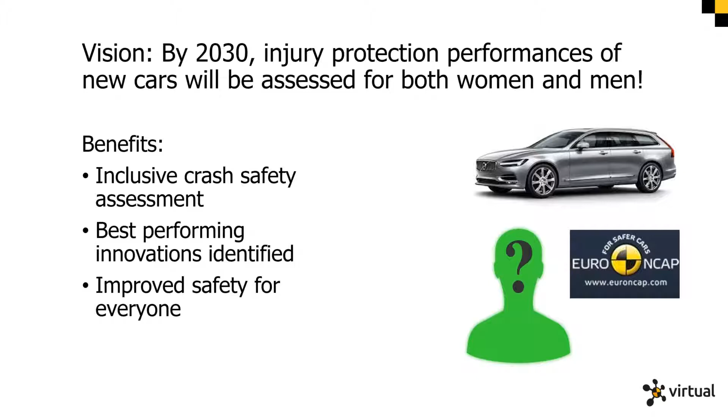We will also be able to identify the best performing innovations already in new cars, as it is today, when it comes to how they work for men and women, rather than waiting 10 plus years before Euro NCAP statistics tell us this. By having a more inclusive assessment of safety, we would improve safety for everyone.

In work package 3, we have a whole work package where we look at occupants in vehicles and novel seating positions for occupants, for the future, where we foresee that we will move into autonomous vehicles, and throughout that we will have a broader range of seating positions and also positions of the chairs.

Then we have a work package on vulnerable road users here, pedestrians and cyclists. The other vulnerable road user group, motorcyclists, is funded in the same funding scheme, but in a separate project. So we are 3 projects funded in one scheme, and one is virtual, the other one is OSCCAR, and the third one addresses motorcyclists.

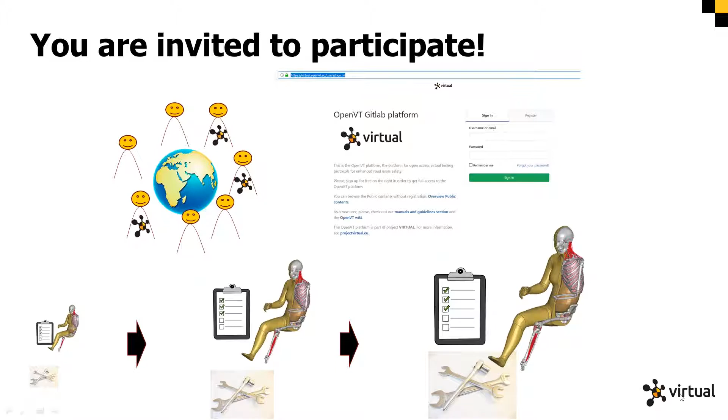So, yes, thank you, Arne.

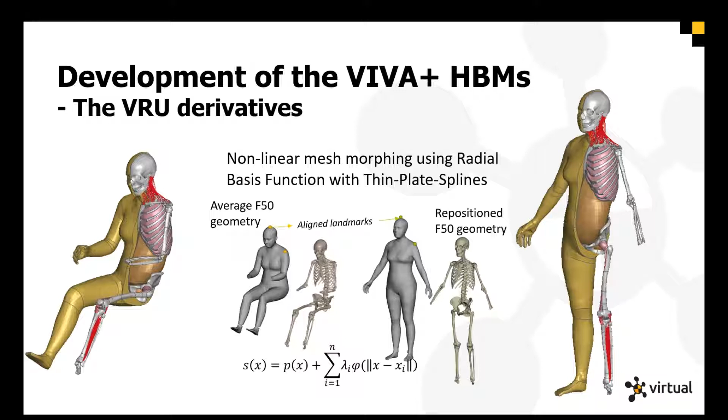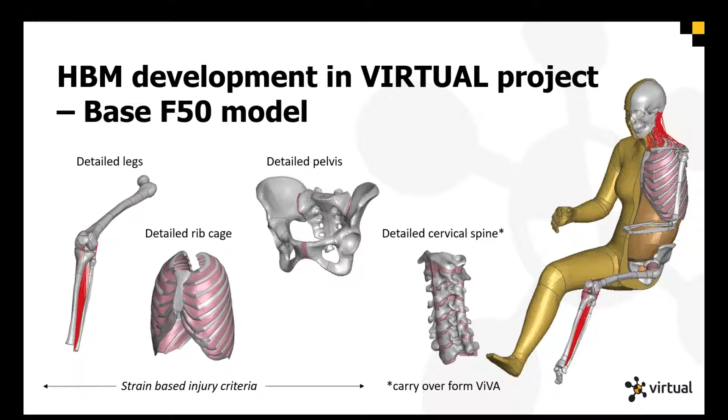The legs, including the knee, the rib cage, the pelvis, are modeled in great detail to allow for strain-based injury evaluation. The cervical spine was already detailed in the original Viva model and has been carried over to the Viva Plus models.

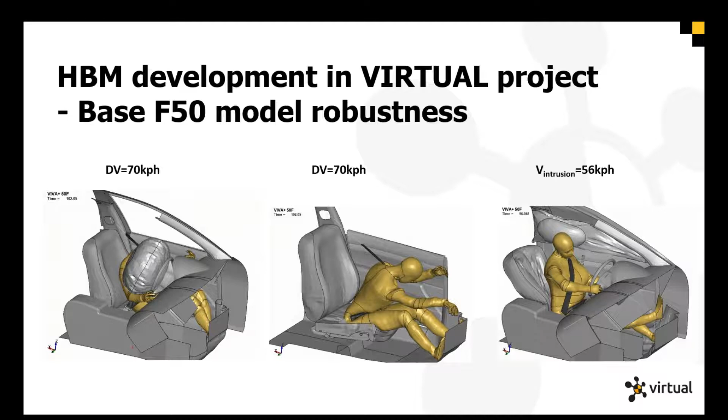So during the rest of the project, or the rest of the year also, we'll focus on model validation and in parallel continue to improve other aspects of the base model. And now my colleague Jobin John will talk a bit about the Viva Plus and open science.

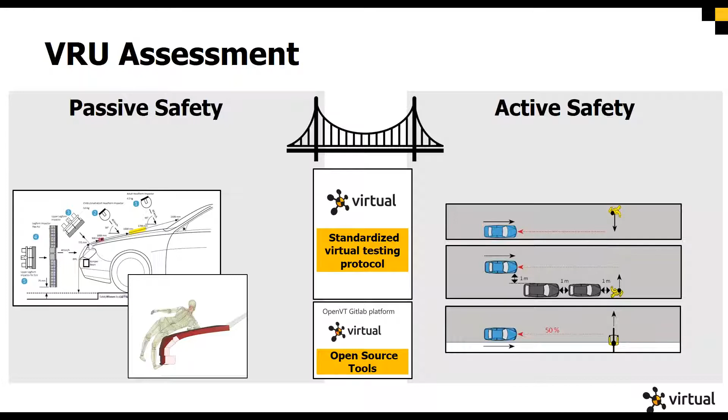And to make sure that what we do virtually has something to do with the real cars on the road, we also define the validation with physical tests for both the in-crash simulation as well as the pre-crash simulation models.

In virtual, we are not focusing on cars only. We also have a use case where we focus on tramways equipped with AEB systems, where we also try this overall assessment, exemplary for some specific cars equipped with specific vehicle safety systems. And we focus on pedestrians and on cyclists, and very important for this whole project, always on the 50% male and the 50% female, as we're also really interested to investigate the difference here.

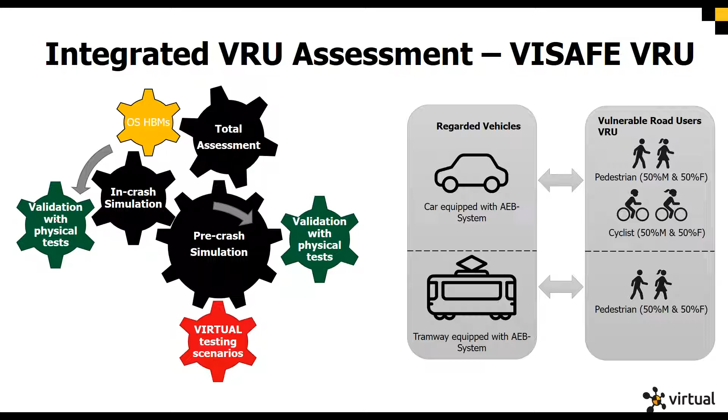We started with an accident analysis as other projects did before, but now, of course, with our specific focus. Overall, we were able to analyze more than 4 million pedestrian and cyclist accidents in the analyzed sample, as the virtual partners had access to multiple accident databases. We had in-depth databases as well as macroscopic databases, so that in the end, we got a quite nice overall picture from Europe.

Based on that data, we then classified our conflict situations. We applied clustering based on the moving patterns of the pedestrian or the cyclist, as well as of the vehicle, as it was published by Lindman et al. earlier. Our aim was to determine the probability of a specific conflict scenario on European roads.

After that, we also derived for each of these types of conflict situations a probability for motion sequence parameters. So that means, for example, the speed of the vehicle, the speed of the vulnerable road user. Then we also added some additional environment parameters, so that in the end, we have a catalog of virtual test scenarios with related probabilities.

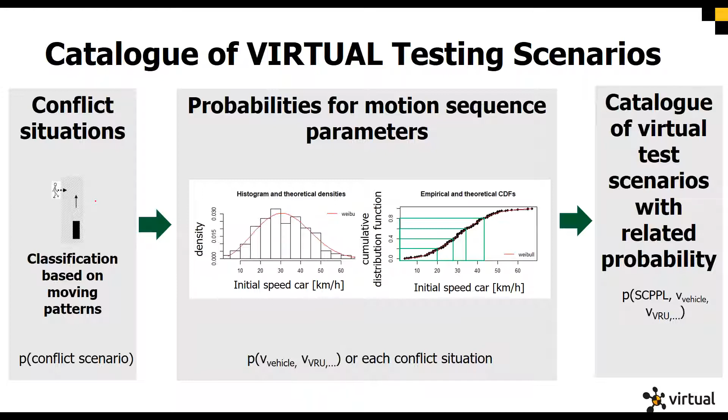So for each type of conflict situation and each combination of speeds and environmental conditions, we do have an overall probability as we have it now on the streets. This is then used as an input for our catalog of virtual testing scenarios between vehicles and vulnerable road users.

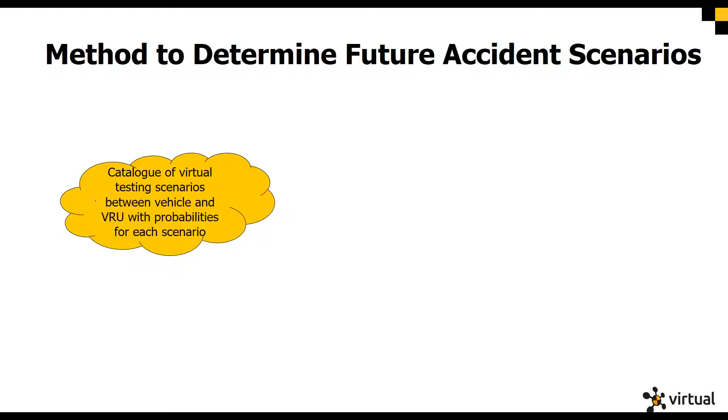Based on this, we built our virtual test scenarios that you can see here on the bottom, and we can run pre-crash simulations with the virtual pre-crash tool, which uses OpenPASS as a simulation platform. So it's also fully open source and will be fully available.

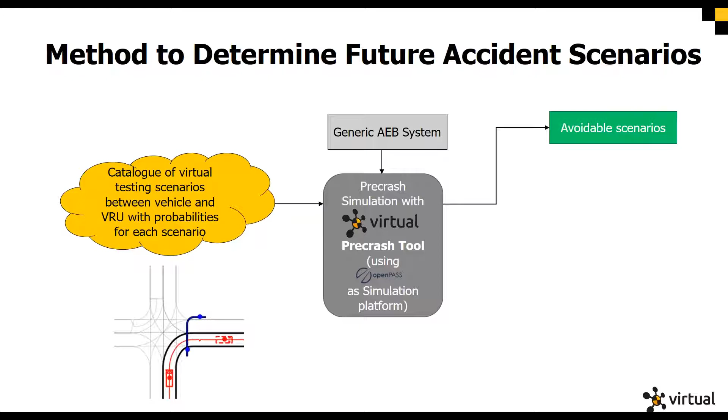When we apply then a generic AEB system or a specific AEB system of a specific car, we can then derive the number of avoidable scenarios, as well as we can also identify those cases that are unavoidable and lead to a final collision between the vehicle and the vulnerable road user.

And based on that, we can define our collision scenarios, which means now really an impact location and an impact velocity, which is the basis of our future accident scenarios for in-crash simulation, because we think that we only need to simulate those cases that are not avoidable by the active systems.

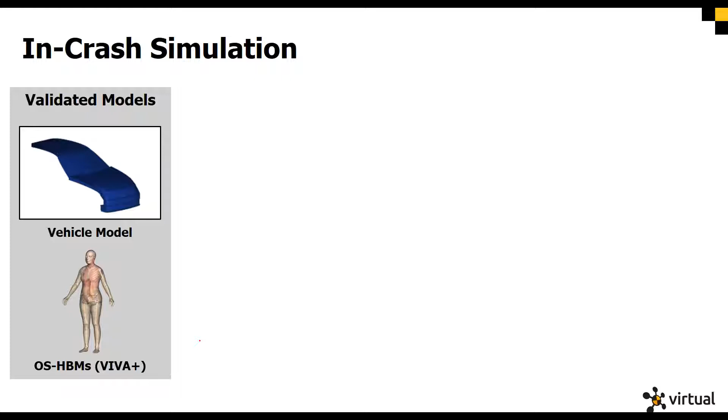In our in-crash simulation, we use now the models that Johan has shown you before. So we use the open source human body models, and we use a validated vehicle model to then perform our in-crash simulations. We then apply post-processing routines of the HBM results with the open source post-processing tools that we have to finally get an injury probability for the specific body regions we are most interested in.

So the aim is that in the end, we do have an overall, for example, femur fracture probability that consists of the probability of a femur fracture for a specific collision scenario. And we also know how likely it is that this collision scenario will happen with a specific active safety system. And that's how we try to make an overall assessment.

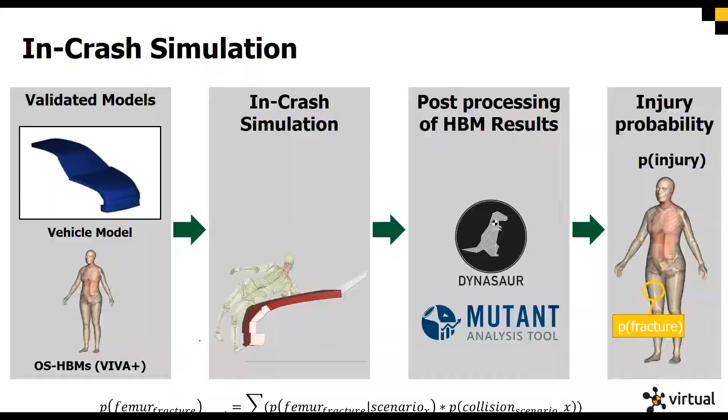If you're interested in reading more about the results, we also have some publications that have been published already. Some are pending, some are in preparation.

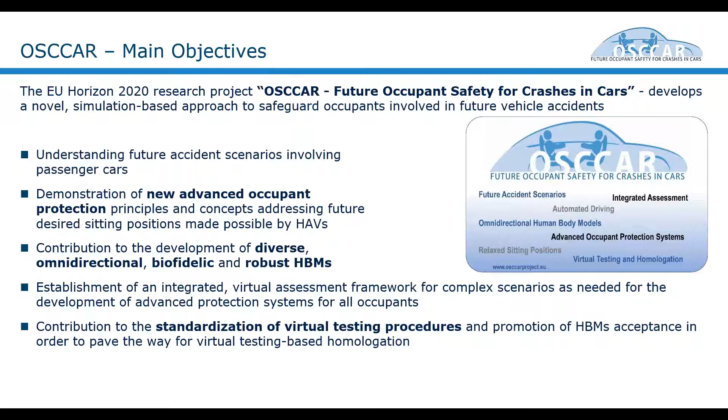A little more detail on up-to-date updates of what we are currently doing. OSCCAR is developing several protection principles with the main focus on HBM applications. We're looking at protection principles in order to safeguard occupants in sitting positions that are relevant for future automated driving scenarios.

Within OSCCAR we are looking at two parts here. The first is to adapt and improve the restraints in order to care for the new boundary conditions. The second area is repositioning the occupant towards a conventional sitting position prior to the crash.

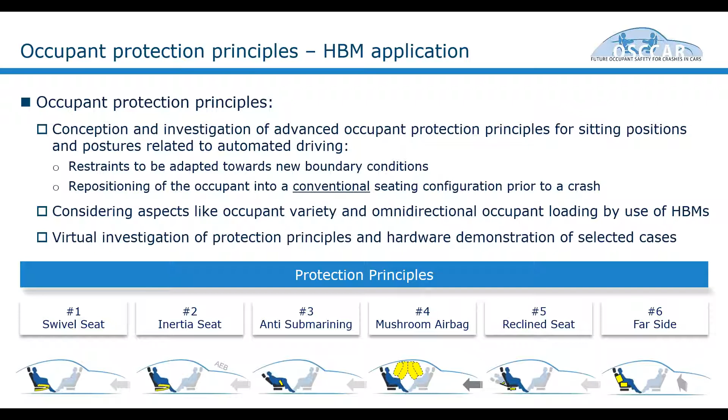In order to do that, we are going to look at the omnidirectional occupant itself and its needs, and develop protection principles. We have 6 protection principles we will look at in more detail: a swiveling seat, an inertia-driven seat with seat rotation, a reclined seating focusing especially on anti-submarining devices, a mushroom airbag for living room conditions, a reclined seat, and also a far side use case.

A little more in detail on 2 protection principles especially relevant to this workshop today, as it was going to be presented at IRCOBI. So I'm going to focus a little on those here.

The first is the swiveling seat, where the occupant is generally forward directed using either a powered system or an inertia-driven system around the Z-axis. That's one of these principles.

The second one, already available on the IRCOBI webpage, is a study on reclined seats, putting the backrest up into a normal backrest position in order to safeguard the occupant in this case.

A little more into updates on what is currently happening in the department in the area of integrated and comparable assessment. We are currently collecting and working on common simulation input criteria that allow for comparing results - not generating equal or similar results, but comparable results, so you're not comparing apples to pears, but actually using the same input conditions. One important area is the HBM seating procedure, seating posture, and seating position, where we are currently developing a software tool that allows for a reproducible seating position.

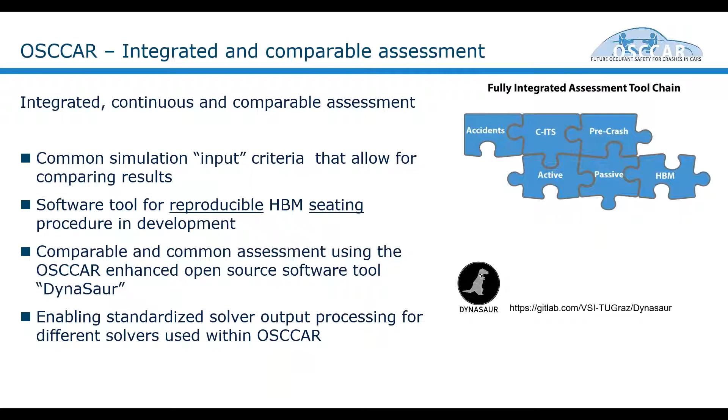So a very important part here. This is necessary to guarantee a standardized solver output so that you can compare and make the assessment in the end for different solvers.

And now to the main focus of this part, virtual testing. OSCCAR is developing virtual testing and assessment procedures in various aspects - that's the most important and most pressing needs. I'm expecting also some input from our further speakers further down the agenda of today.

There was a first proposal already published on virtual procedure on environment validation here by Eggers at last year's VDI conference Fahrzeugsicherheit, very important. Apart from that, harmonization efforts are being driven a lot in this project, and we are also going to prepare and work on a homologation test case demonstration.

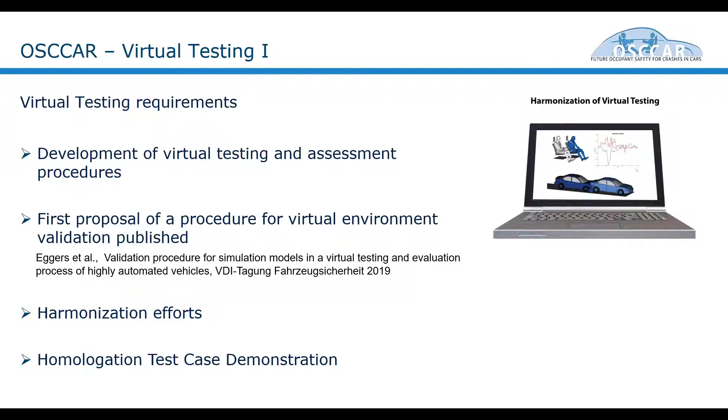A little bit putting everything into the bigger picture here. In order for virtual testing, virtual assessment, and virtual homologation to be effective, all the necessary areas of the use case and occupant protection need to be considered.

One of these areas is future accident scenarios, and within OSCCAR, generic load cases were developed for future relevant accident scenarios. In addition, a methodology to estimate the generic crash pulse for these crash configurations, so that within OSCAR we can have relevant crash pulses based on state-of-the-art finite element vehicle models.

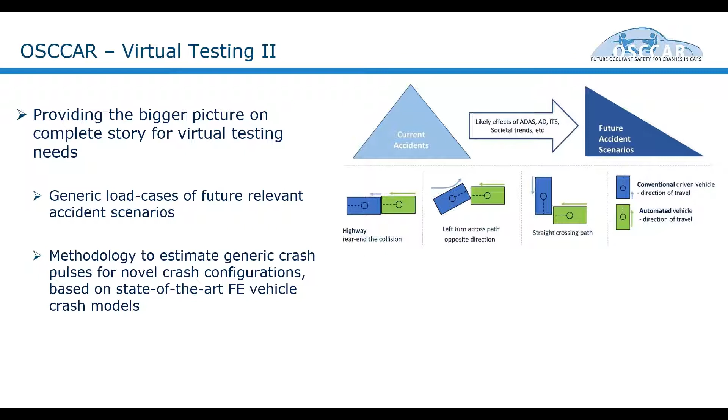Third part, as mentioned before, definitions and relevant terms - in this case together with the THUMS user community, harmonization on definition of terms was done. I'm not going to read through all of it, but there's a big suggestion here on how to define verification, validation, calibration, and certification of models and environments. The suggestion for this can be found on the OSCCAR homepage and also on the THUMS web page.

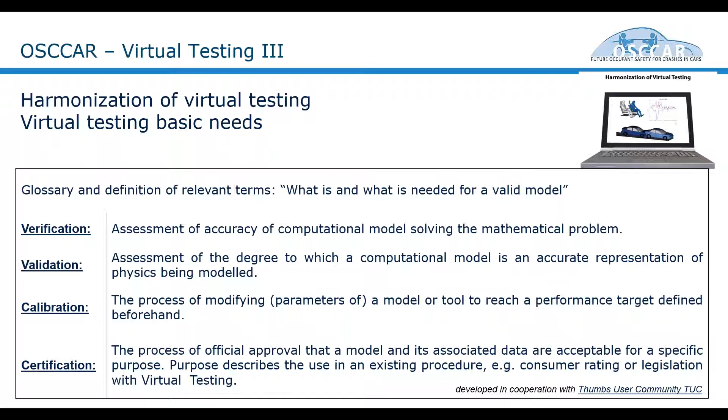Link is down here. Last but not least, from my side here today, in respect to virtual testing, we're going to provide a homologation test case demonstration within OSCAR. This should be an exemplary procedure for future virtual approving using HBMs.

An important part here, we're going to use extrapolation of hardware test based validity to a new virtual-only test case. This is a test case where no fallback option to doing it in hardware exists any longer. OSCCAR here will focus on the reclined forward-facing occupant position, and Andre will talk about that a little bit later in more detail.

Important here, we're going to demonstrate a method that delivers comparable results. As I said before, we are going to use different models, different solvers, so we are not going to produce identical results, but comparable results with the same input. As we assume, or as we hope, and as we strive for, this will be the basis for credibility and acceptability and acceptance of virtual testing in general.

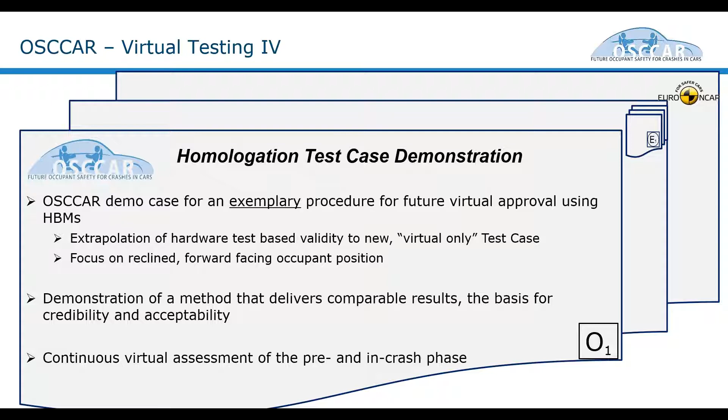OSCCAR is also going to look at this load case continuously from the pre-crash to the in-crash phase, so the complete accident and relevant accident phase for occupant protection is going to be dealt with. Okay, going to hand over to Christian, who's going to introduce the following speakers and content.

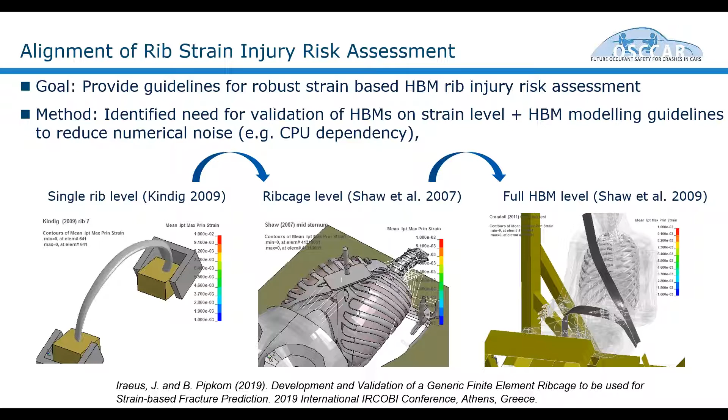In addition, as with all models, it is essential that the human body model is properly validated. Here this means we need to show that the model accurately predicts element strain for a wide variation of load conditions. In particular for the validation of rib strains, we propose to use a set of validation load cases at different complexity levels. From the left, we can see well-defined single rib tests to check rib stiffness and rib strains. In the middle, we have a tabletop test to check rib cage stiffness and strain distribution. And finally, to the right, a sled test to check the kinematics and rib strains in a more realistic environment.

There are many different strain measures, as most of you probably know, and the strain can be evaluated at different locations in the cortical bone. In the original publication, neither the strain component nor the location is mentioned, and there is currently no consensus about how to use this.

We propose to use the maximum principal strain, also called the first principal strain, as the strain component, and to measure this at the outer surface of the cortical bone. The reason to evaluate strain at the outer surface is because rib cortical bone can be regarded as brittle, so as soon as a fracture starts at the surface, the rib will fail. Also, elements adjacent to attachment points of discrete elements or beams used for modeling muscles, and other areas with unphysical loading, can be excluded from post-processing.

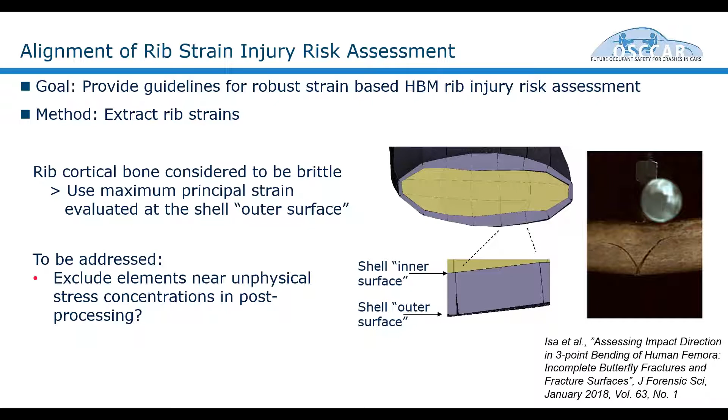As mentioned before, tissue-based injury criteria are sensitive to numerical noise. If left untreated, this will lead to an overestimation of injury risk and non-robust evaluations. So we propose to use some type of filtering, for example a time gradient filter. However, this is still work in progress that we have to come back to later on in the project.

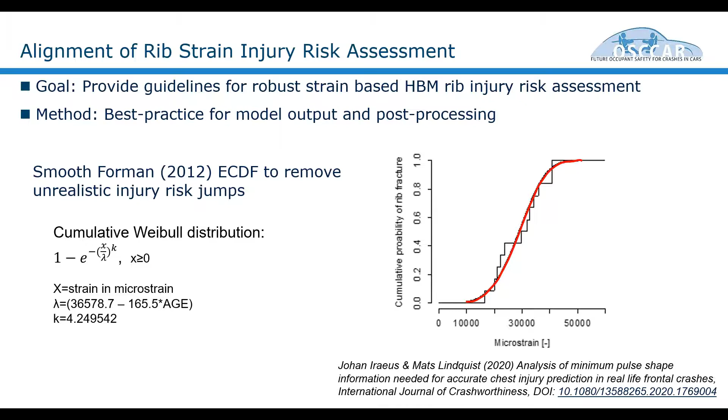And with that, I will hand over to Lennart for the next topic. Thank you very much, Johan. Okay, I hope everyone can hear me.

I would like to talk about a method on how to evaluate injury severity to the muscle tendon unit. We were thinking about such an evaluation because we wanted to develop a method to evaluate the risk of passengers sustaining minor injuries due to the function of pre-crash safety systems shown before, for example the rotating seat. We wanted to make sure that the passenger does not sustain injury to his or her musculature because of the rotation itself, for example.

The injury criteria for the muscles themselves were based on one type of injury mechanism, strain injury. The reason for that is because hill-type muscle models, as often employed in active human body models, are modeled as 1D truss elements and therefore have no volume, so other types of injuries such as lacerations or contusions cannot really be modeled with these types of muscles.

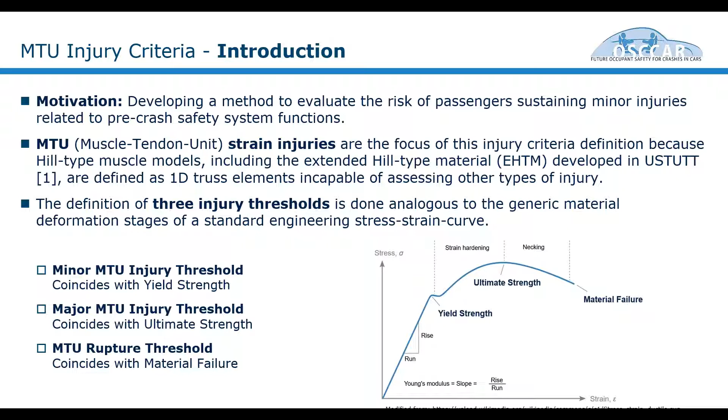The injury criteria themselves should also include a gradient of injury severity. So we decided to define three injury thresholds for minor, major, and rupture injury. We tried to find values which would correspond to the yield strength, ultimate strength, or material failure of a generic engineering material, for example like steel.

Through literature research, we were able to identify thresholds for the tendon, a completely relaxed passive muscle, and a 100% activated skeletal muscle. You can see the threshold values in the table below. The tendon injury thresholds were based on the strain the tendon is put under, which is easily measurable, while the muscle injury thresholds are based on the tensile force needed to pull the muscle to failure. Two questions arise from that, one being: how does one obtain this tensile force?

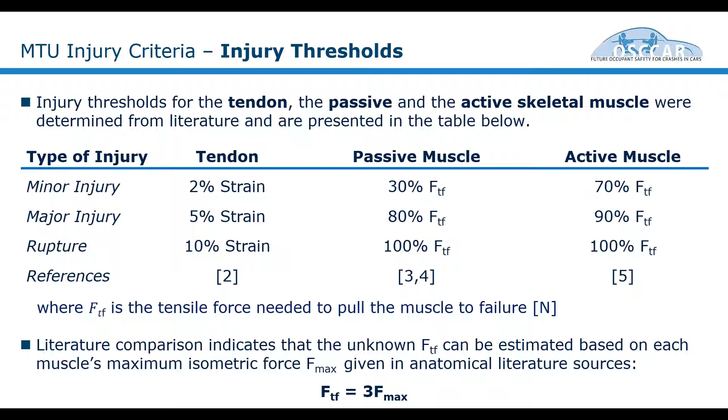Because it is not readily available in literature, but from comparison of biomechanical data sets, we came to the conclusion that this tensile force can be estimated as three times the muscle's isometric maximum force output. So this tensile force would be three times F max.

The next question is that I just showed threshold values for a completely relaxed and a completely activated muscle. But of course, if you look at stimulation that is biofidelic, you will get activation values in between these two extreme threshold values. The way we calculated the injury threshold values between completely passive and completely active was simply through linear interpolation, depending on the activation.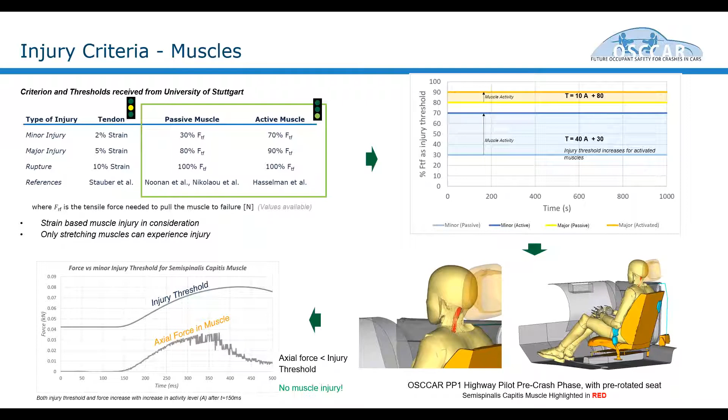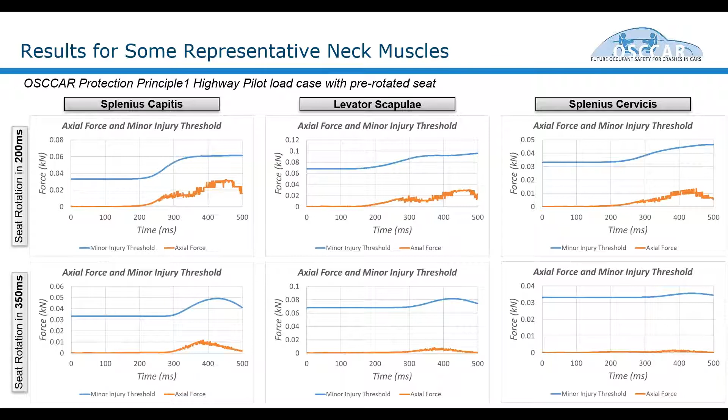This is just a quick overview to show you that this holds true for other muscles as well, even for seat rotations in 200 milliseconds as shown in the upper row, and for the slower rotation of 350 milliseconds shown in the lower row.

Now I will change topics a bit and give you a quick overview of some plans we have for the future, namely how to adapt control algorithms to model population diversity and mobility-impaired people. For that, we decided on three groups of passengers we would like to take a closer look at.

The first group is elderly occupants, which can be characterized by an elongated reaction time dependent on age and gender. For these passengers, we would introduce a stimulation signal delay, so pretty straightforward.

The same goes for wheelchair-bound occupants, where one could simulate the reduced lower limb control by not stimulating muscles in specified limbs. The last group of passengers we would take a look at is occupants suffering from neural diseases.

There are a few neural diseases which would lend themselves quite well to this simulation approach. The first is acquired neuromyotonia, which is characterized by spontaneously occurring muscle activities. This could be modeled as stimulation noise.

The second is cerebral palsy, which is characterized by reduced inhibition of the stretch reflex. For this, one could change the settings of a length-based reflex controller so that this defective stretch reflex can be modeled.

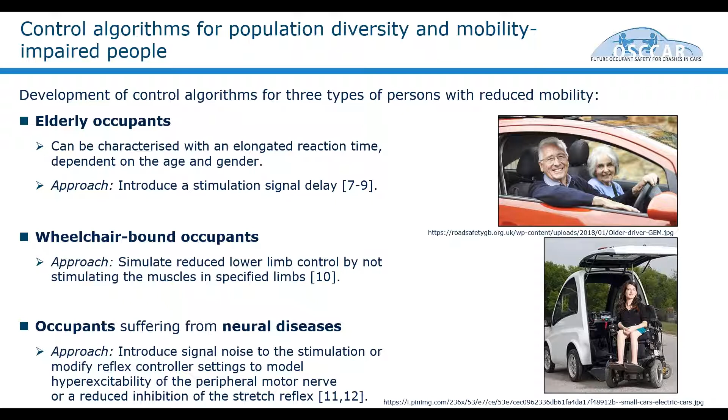Thank you, Lennart. So what I'm going to talk about today is a validation catalog that can be used to validate active human body models in pre-crash scenarios. We want to look at active human body models because it's an important part of the OSCCAR goals, and it was decided that it would be important to compare the active human body models from different groups in the OSCCAR project by having a common set of validation data that we could all validate our models to.

So in this validation data set, we specifically looked at pre-crash data, because active musculature potentially has a more important role in these pre-crash events. To look at the validation for these scenarios, we did a literature review. We found 25 different volunteer experiments, but we selected experiments specifically so that they would be reproducible for validation of human body models.

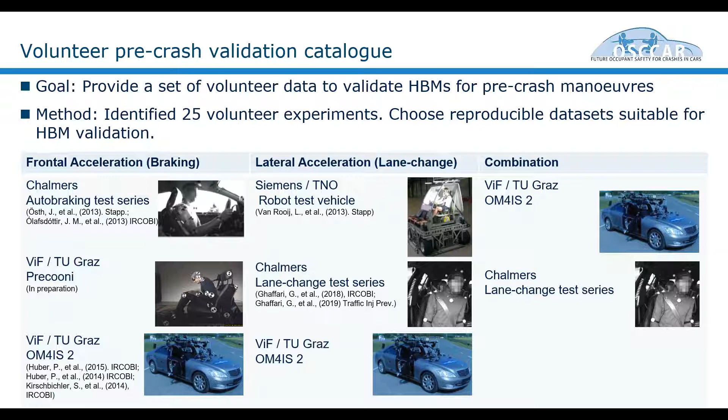As I've referenced, in order to be able to validate these cases, we want to have boundary conditions that are well defined. So an important part of having well-defined boundary conditions is to have at least part of the seat and environment modeled. That can be really difficult if you don't have access to the geometry.

So for the load cases that we selected, we have seat models for three seat models that are applicable to multiple load cases that were selected. To start with, I'll speak a little bit about the Chalmers seat model.

So we had the geometry for the seat based on a Volvo supplied seat model, and we morphed a generic seat to match the geometry of the Volvo seat model. Then we tuned the foam material properties to match physical indentation tests that we performed on this seat. This seat also includes both standard seat belts and pre-tensioner seat belts.

Next is the VIF/TU Graz seat model. Their physical seat was based on a 2012 Mercedes-Benz, but this seat was stripped of its foam and outer layers, simplified pieces of foam were used, and then artificial leather was placed on top. The geometry of their model was based on scans of the physical seat, and the foam material properties were taken from physical material testing of the foam in the seat.

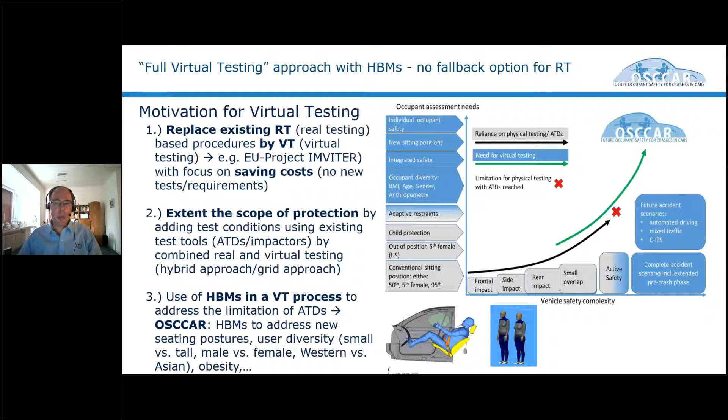Okay, thank you. So I will talk about virtual testing, which is the final part. This is about the full virtual testing approach with human body models, which has been developed in our virtual testing work package together with some other partners who contributed to this part of the presentation. The focus of my presentation today will be a vehicle interior model certification process by validation, and why this is so important for this human model-based virtual testing approach. I will explain now.

Before going into this, I would like to start by talking a little bit about what is actually the motivation for virtual testing in general, also looking at some previous initiatives. In other projects, for example the EU project IMVITER, it was only about replacing existing real testing based procedures with virtual testing, and the focus was only on saving costs.

Another motivation for virtual testing could be to extend the scope of protection, for example by adding new load cases, new conditions, varying test parameters, using other dummies. But this can all be done with today's available dummies and test devices, and this is a hybrid approach, which we called combining virtual testing and real testing.

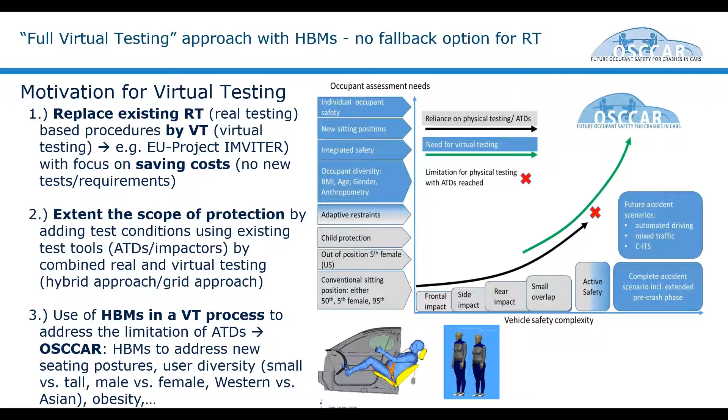Vehicle safety is getting more and more complex. The occupant test tool needs are increasing, and at some point in time we cannot cover this anymore with dummies, and we'll need to go for human body models.

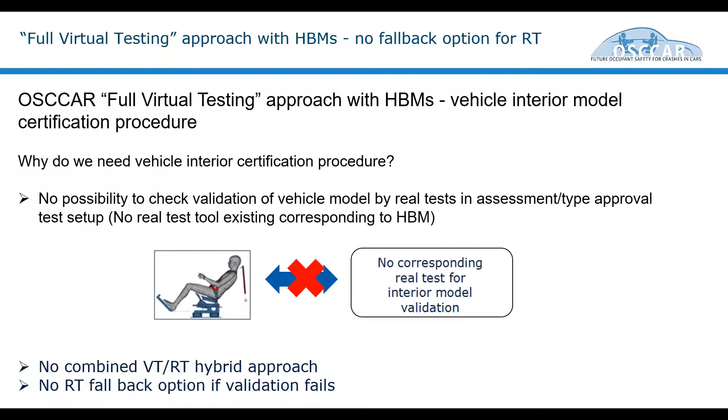But there's one aspect we have to think about. If we use a full virtual testing approach with human body models, we only have the occupant model available virtually, so somehow we need to make sure that the vehicle interior model we are using is also validated. That's why we need a vehicle interior model certification procedure based on validation. In the final assessment, there's no possibility to check that the vehicle model is valid, because we cannot compare it to a real corresponding test, since we don't have the corresponding real test tool. So in a full virtual approach with human body models, there's no fallback option if we cannot validate the vehicle model.

Thinking about that, we developed a process which you can see here. There's a first phase where the vehicle model is developed, done by the vehicle manufacturer. In the case of occupant safety systems, it's only the interior environment model, so everything that's in contact with the occupant. Some code-specific requirements and quality assessment requirements will have to be taken into account, along with some internal experience about validation. But the next step is a more official validation process, where some validation load cases have to be defined, which can be carried out with the model and at the same time by a real test.

So we need this test configuration, and for that, use some objective rating procedure to validate the vehicle interior model. With this certified model, and what we can see here on the top, also a certified and agreed human body model needs to be available. So we have a vehicle part of the model, the environment or interior model, the human model, and can combine this in a new assessment procedure, which is done completely virtual according to a standardized process, and will be used to evaluate the vehicle safety in a new

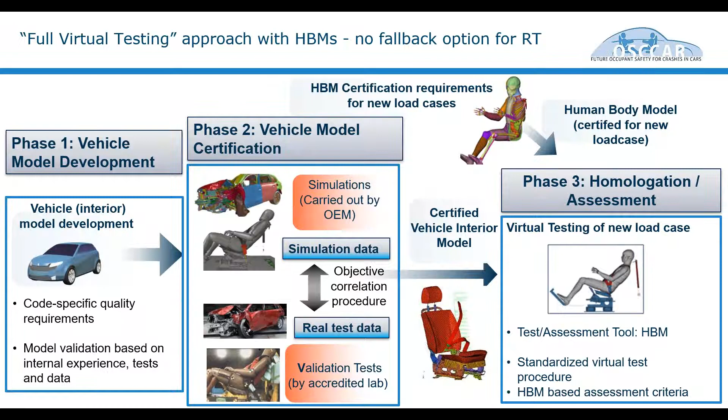Looking a bit more at this model certification phase, how it looks like. So we need to define validation load cases which are representative of the new loading condition, which can be a crash test, sled test, or subsystem tests.

And we also need to define the validation tool, which could be a currently available dummy, but also some kind of modified dummy, if it's not possible to use the current dummy, or could be also a new simplified validation tool or dummy. And based on that, we need some objective correlation procedure, which is also important because we might want to look at very specific validation measurements and channels which are specific for the load case.

And based on that, we need to define thresholds, which are on the one hand demanding, but also achievable. And this should take into account the real test scatter.

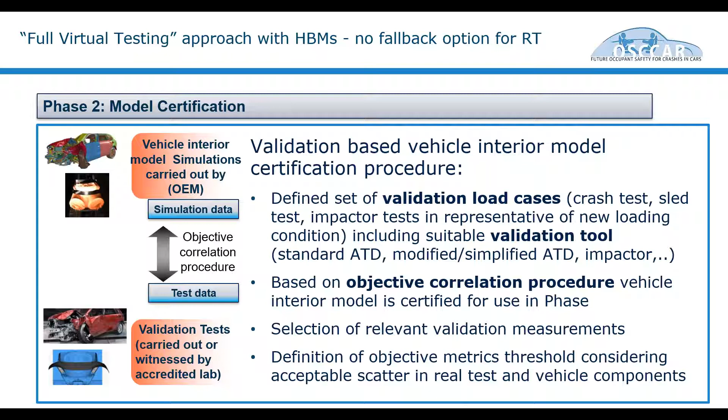Applying this to our OSCAR homologation test case, which, as Werner explained before, will be a frontal impact case with a highly reclined seating posture. And the test tool will be a human model representing an average occupant, including some improvements in the soft tissue layer.

The interior validation load cases that we in OSCAR proposed as a first step are sled tests using the THOR dummy as possible validation tool, and tests have been done in different conditions, for example here in the upright and reclined position. The sled tests have already been performed in the project, and we use this for interior model validation, also looking at 3 different codes to see if this can already also work in different codes and gives comparable results.

So that's what we did so far and what we are still planning to do in the remaining part of the project. We want to compare THOR and HBM simulations in the validation load cases to get an idea if these sled validation load cases are appropriate or if we need some additional validation load cases, and also looking at the THOR dummy if it's actually a good validation tool or if something else would be better.

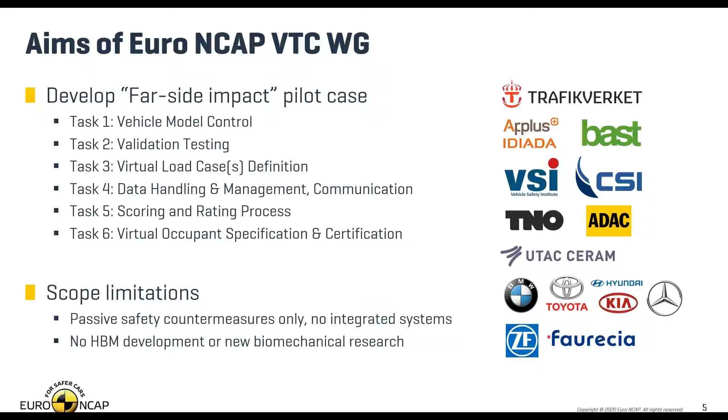So why did we go for far-side? Far-side is a relatively new test procedure in Euro NCAP. It was only introduced a year or two back in terms of monitoring, and this year we'll start really adding it to the rating scheme. It was originally foreseen to do that on a sled basis, which is, of course, a simplification of a full-scale test and therefore quite attractive from the modeling point of view, because we can actually model this more easily and accurately than a full-scale crash test. It calculates faster and there are better ways to control the boundary conditions with an input that is given on the sled. So the sled procedure is basically using a WorldSID dummy on the driver position.

Then it gets exposed to a far-side loading pulse - MPDB pulse, MDB, as well as pole pulse are studied here. And we actually look at the kinematics of what's going on in the dummy and whether countermeasures such as center airbags are doing a good job in keeping the dummy in place, but also protecting against injuries in the chest and head and neck and so on. So that is the starting point of this procedure.

One of the things we discussed already in the group is whether the protocol as we have defined it today is sufficiently accurate and well specified for the purpose, to give us enough input to do a proper validation. And there are recommendations here to add different sensors, more precise measurement of the dummy position, etc., to the protocol, to have the possibility to accurately make this digital twin in the computer environment. Once you have done that, the question is, what are the relevant virtual variations that could actually benefit the safety of the consumer if we would do that as an addition to the physical test?

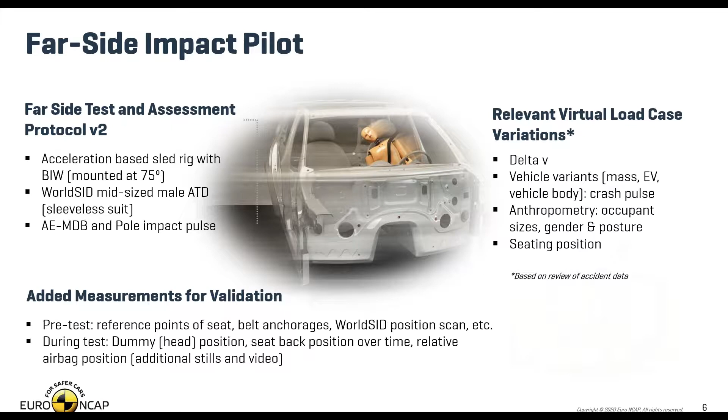So when it comes to human test tool definition, let me start with the ATD model itself. Here already, if you talk about the practicality of using dummy models, you will immediately end up recognizing that there is a lot of variation in ATD models, even though the dummy is pretty much well specified through ISO in this case with the WorldSID dummy. There are different codes, there are different code versions, there are different model suppliers. Some are commercially available, some have in-house modifications. Then you have different model versions that are being used.

There are different generations of the models, and in many cases these models are linked to the vehicle program that the manufacturer has used. So they start a program with a certain variation or model version and will not change their dummy model during the development process.

So these are things we need to consider. We cannot basically say you have to do this virtual testing with a specific dummy model in a specific code, because it would actually create huge bottlenecks at the vehicle manufacturer or supplier side to make these calculations work in the end. So we chose to go another way.

Rather than specifying a particular dummy family model, we say we want to go to a certification catalog that vehicle manufacturers need to run their models against, to show that the quality is assured and that they meet an average performance. That may sound familiar — it's quite similar to what Coherent is doing with human body models for pedestrian safety in Euro NCAP. But in this case, it would specifically be for near and far side load cases, including some simplified restraint interaction, which are quite important to have.

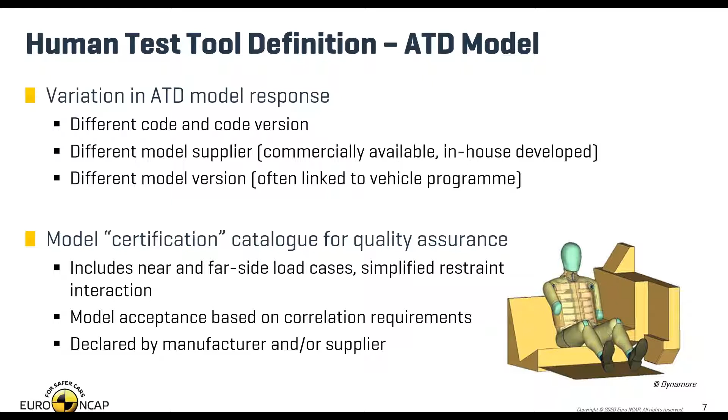Of course, ultimately this is a manufacturer-declared process. The dummy models are used by them. You could also think about the supplier of the model ultimately doing this for the vehicle manufacturer as part of the release of a model.

If we talk about human body models, and that's of course more interesting for today, we sort of see the same thing going on as we do for dummy models. However, we are a little bit behind in terms of where we are with human body models, and there may be other things to take into consideration as well.

Our feeling is that a lot of work has been done already — on virtual and OSCCAR, and even outside of Europe, in the US, Japan, Korea, China, there are initiatives looking at this. So we feel it's very important to bring the knowledge together in a roadmap to really see: can we agree on the most fundamental things that need to be taken care of if ultimately we're going to apply human body models in a process like this.

This human body model for virtual testing is a framework that just started, coordinated by Corina Klug and Philipp Wernicke from BMW. It's very transparent, everybody can cooperate, but the intention is really to address some of the things on the screen here: common anthropomorphic references, biomechanical basis, validation levels, harmonized human body model application methods, and ultimately leading to transparent human body model requirements for future virtual testing applications.

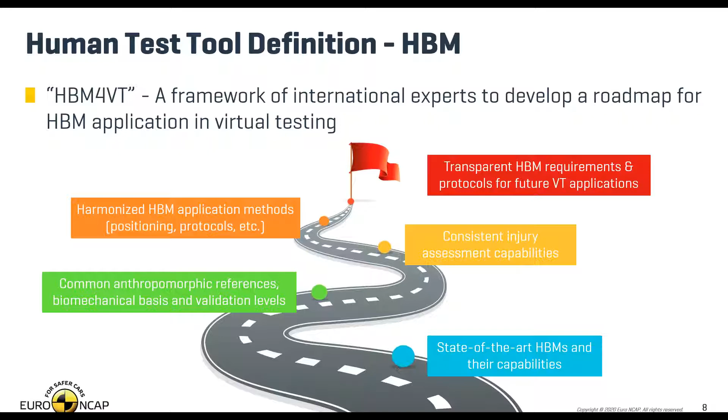So I want to finalize with an overview of quality control and checks. Ultimately, what's really important for Euro NCAP is that we can have trust in the process we're starting, and that we can defend computer modeling to the consumer — so the consumer cannot say to us, well, you've just accepted some simulation computers, what does that mean for my vehicle? That trust question is quite important for NCAP, and therefore we need to think about how we control the flow of simulations that ultimately lead to acceptance of the solution.

So you see here the three things I talked about: the occupant model itself, the vehicle environment model that needs to be validated, and ultimately the assessment models — those variations of the protocol that add real-world robustness to the assessment. First, the occupant model, which I discussed already: it's going to be the supplier of the model or the OEM to run these simulations against a certified catalog. At the moment, I think we should consider that there may be additional certification needed for a specific vehicle or a specific restraint system that we haven't seen before.

So I think we should not close the door immediately and say certification catalog is the only thing needed. It could be that you have a very novel restraint system where the human model or the dummy model even is not really validated against yet and could have problems, and therefore additional certification could be required. Ultimately, it's going to be Euro NCAP saying that, have you met the certification acceptance criteria?

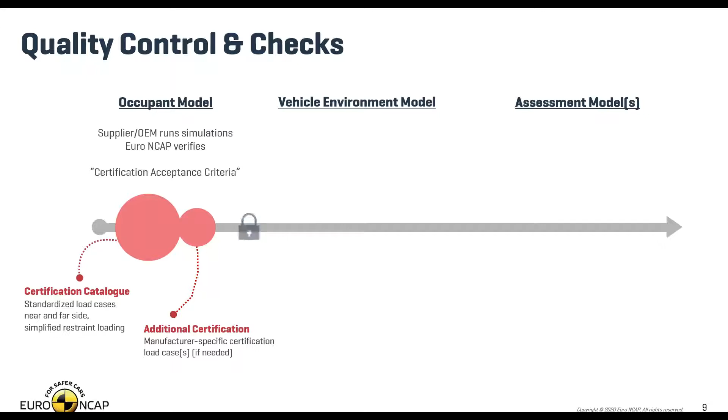Yes, then you can basically proceed to the next level, which is the vehicle environment model. And of course, the models at that stage should sort of be frozen or locked, so to speak, to make sure that you're not optimizing the vehicle, the dummy model, or the human body model as we go forward. So vehicle environment model is, of course, more complex.

It would be the OEM or the systems integrator that runs these simulations. It would be ultimately Euro NCAP to verify based on validation acceptance criteria. And of course, if you talk about validation, you talk about material validation, component validation, system validation. Those are the common levels that everybody is aware of. The question, of course, is how much of it is really needed from the NCAP verification point of view.

Last but not least, again, you can lock ultimately what you have to some extent, and then only allow the variations that the protocol prescribes in terms of load cases, so variations in boundary conditions, seating positions, etc. Of course, a lot of these things are now being developed by OSCAR, Virtual, and elsewhere.

I think what is clear to us already in the working group is that we need to verify the occupant model, we need to verify the vehicle environment model, and we need to look finally on the assessment model results to include that into the rating. So these are things that are clear.

What maybe is not so clear is what are we going to do with, let's say, additional vehicle manufacturers certification of models, or are we going to really need to go to material validation levels and component validation levels in ultimately accepting a validated vehicle environment model? So these are things that are still open in my view, where we need to see what is reasonable, what is sufficient for getting trust in the process, just the top level, or do we need to go deeper to some extent? So with that, really, I wanted to stop my presentation.

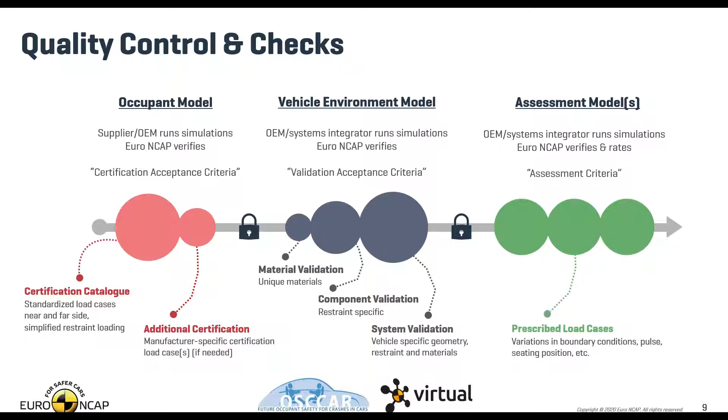This is as far as we come. There are a lot of discussions underneath, which I don't want to go into detail about. But I think this gives you quite a good indication. So virtual testing for us offers many opportunities, but everybody knows that there are important challenges to overcome when you want to do this, certainly from an NCAP perspective.

I think what we can clearly report on is that the industry and the academia and Euro NCAP really are working together now to see if we can move the needle and we can make a feasible methodology that can be used for crash protection systems in the way that we foresee it.

And then we've chosen the far side impact situation as a starting point because of its complexity and also its current limitations in the physical sense. But last year, we really focused on model quality control, which I think is fundamental in achieving the trust, which is, of course, one of the more important parts in Euro NCAP's work.

I think we were having some trouble showing Marcy's screen, but now it should be working. Does it look okay? We see 2 slides now. Let me try again. While Marcy is getting this to work, I can share with you that we had a substantial learning curve, all of us here, but you never know what happens in the last moments, even though we have practiced quite a lot. We still see two screens. And I think Marcy got up today at 4 a.m. to try that out. I did, and it still doesn't work. Oh, here it is. There we go. Oh, now it's perfect. Excellent. Okay. Sorry about that.

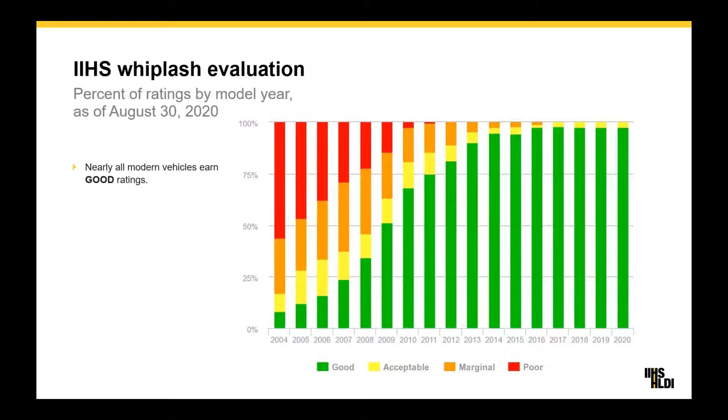However, as you can see in this chart, almost all our current model year seats are rated good, and yet in our real world data, we still see a range of injury claim rates. This tells us that our current whiplash rating program is no longer able to differentiate between worse performing seats and better performing seats in the real world. So this has led us to pursue further whiplash injury research.

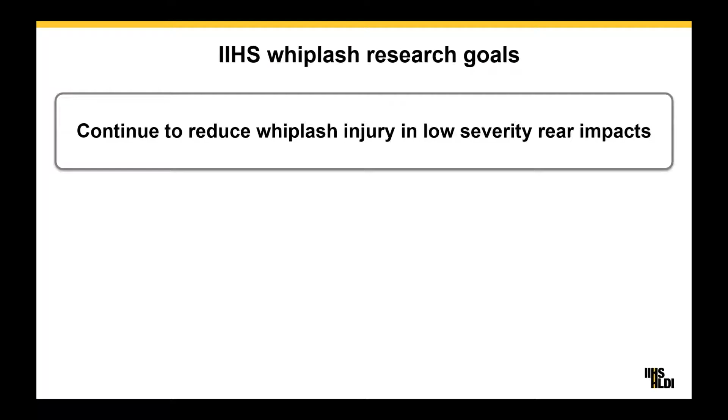As many of you know, we've been working to identify meaningful ways that we can update our protocols that will affect real-world whiplash injury. This involves encouraging active safety technologies like AEB and driver assist features. It also includes encouraging robust seat designs that can protect many occupants. Specifically, we are looking at alternate crash severities, varied occupant positions, and a range of occupant sizes and sex. In this presentation, I will only be focusing on the passive safety aspects of our research.

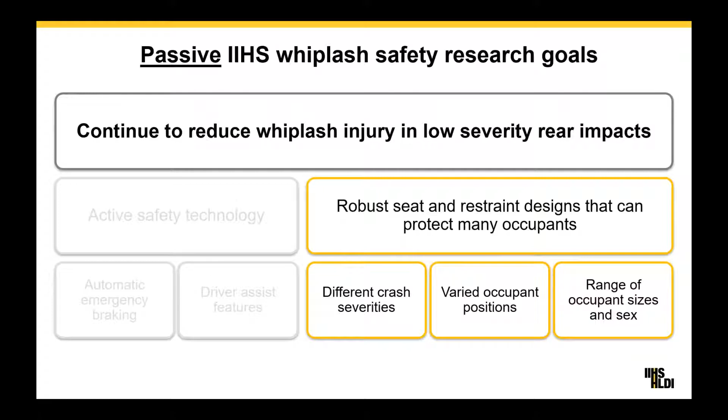As I just mentioned, we are planning to encourage robust seat designs by researching different crash severities, occupants seated out of position, and a range of occupant sizes and sex. For different crash severities, we are researching the addition of a higher severity physical test like the Euro NCAP 24 km/h delta V pulse or the J NCAP pulse.

For out of position occupants, we have 4 research goals. We want to look at realistic out of position scenarios. We want to look at alternate positions that can be achieved with the BioRid physical dummy. We want to understand the feasibility of evaluating these alternate positions with BioRid models. And we want to understand if human body models represent human occupant out of position scenarios better than dummy models. For researching the range of occupant sizes and sex, we want to understand whether alternate size or female dummy models improve the correlation of test results to real-world data, and if human body models offer more options for evaluating a variety of occupant sizes.

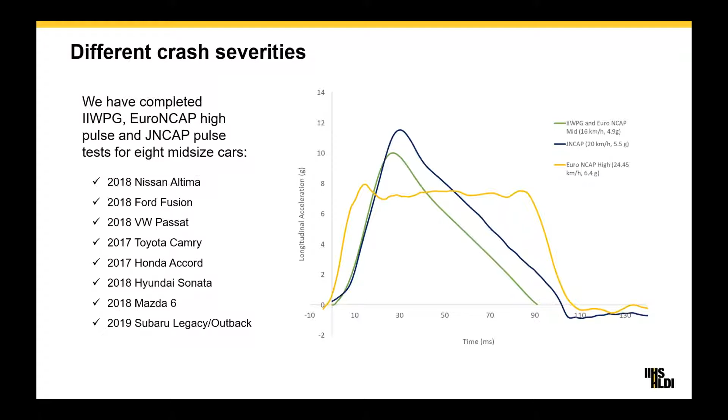However, for the near term, we are only going to be focusing on these 4 tasks still highlighted. First, I'm going to briefly share some about our physical testing research for different crash severities. For this group of 8 mid-sized vehicles, we have conducted tests with the IIWPG pulse, the J NCAP pulse, and the Euro NCAP high severity pulse. Then, using their respective rating schemes, we made correlations with our insurance injury claim rate data for these vehicles, and we found some promising correlations.

So next, our next topic is whiplash research in the assessment of alternate occupant positions.

For this research, we envision three initial phases. First, we want to identify real-world out-of-position scenarios from naturalistic driver data. Second, we want to investigate using the physical BioRid dummy in alternate seating positions and the biofidelity of BioRid in these positions. And we want to research the feasibility of evaluating these alternate seating positions with BioRid computational models.

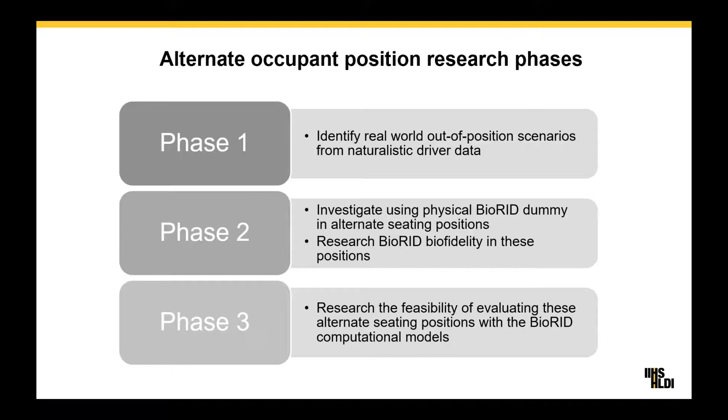First, we would like to conduct research to understand how current driving behaviors affect interactions with the modern generation of seats and head restraints. For locations and scenarios we've identified as common to rear impacts, we plan to use naturalistic data to observe occupant behaviors at those locations, for example looking down at a phone. Then we want to categorize how these behaviors affect occupant position relative to the seat and head restraint.

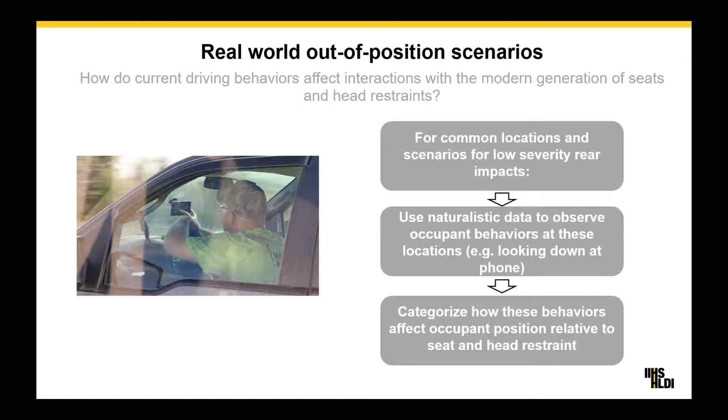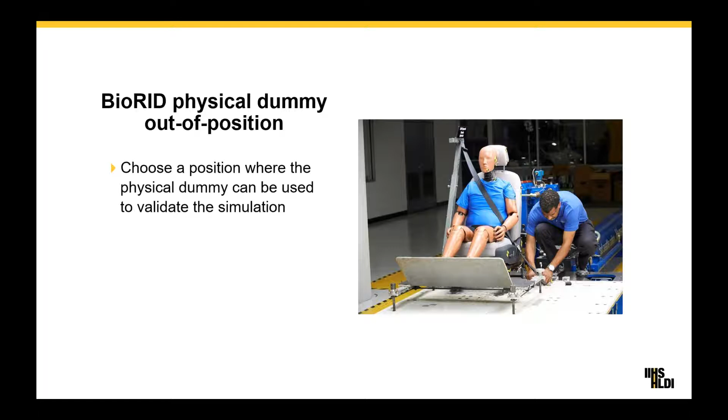Then we plan to conduct research to understand out-of-position scenarios that can be achieved by the physical BioRid dummy. We hope to use the physical dummy to validate simulations, so we want to choose target positions achievable by the dummy.

Finally, as part of our research goals, we want to understand if we can develop a process to use seat and dummy models to reliably predict BioRid dummy response for an out-of-position scenario in an automaker-developed seat model.

To do this, we focused on three tasks. One, verify that the model can represent the physical BioRid dummy for the out-of-position load case. Then, develop a method for assessing the fidelity of the automaker seat model. And finally, compare simulation responses to hardware responses for the out-of-position condition.

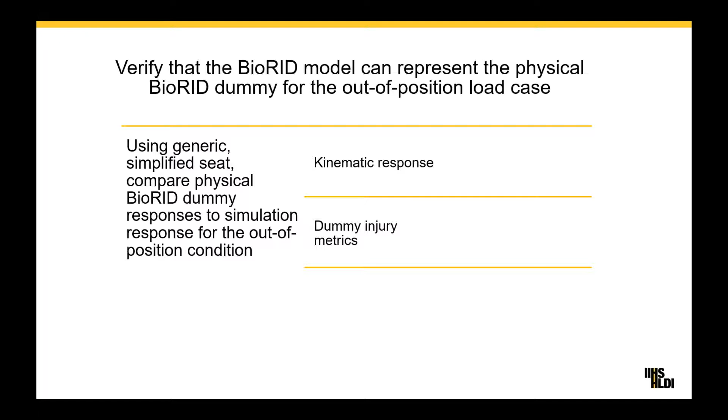In order to verify that the BioRid model can represent the physical BioRid dummy for the out-of-position load case, we plan to use a generic simplified seat to compare the physical BioRid dummy responses to simulation responses for the out-of-position condition. We will look at both the dummy kinematic response and dummy injury metrics.

Then we want to develop a method for assessing the fidelity of the automaker seat model. To do this, we want to compare simulation results and hardware results for an existing in-position physical rear impact test using seat kinematic response, dummy kinematic response, and dummy injury metrics.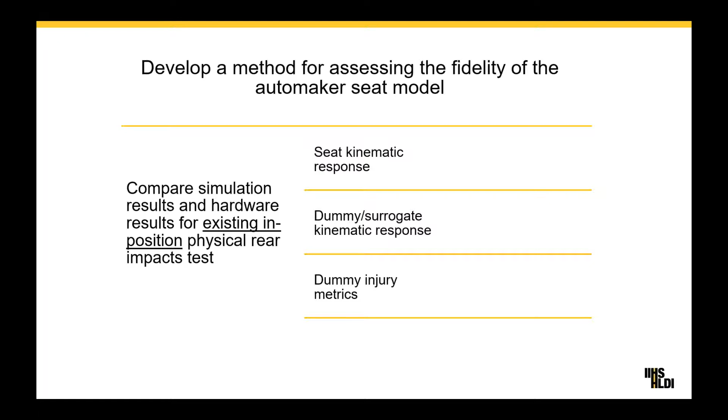And then we will compare the simulation response to the hardware response for the out-of-position condition, also using seat kinematic response, dummy kinematic response, and dummy injury metrics.

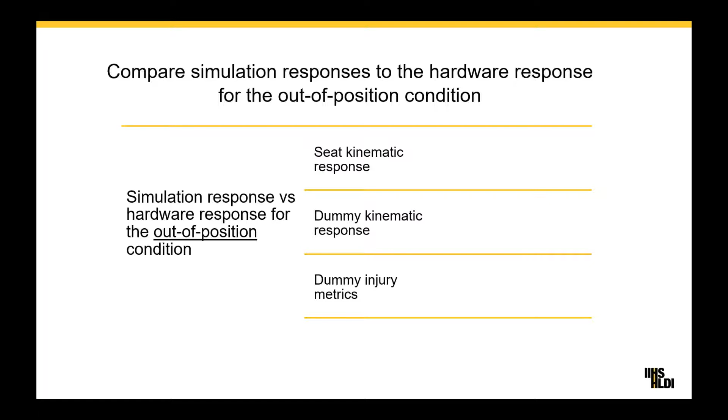In this process, we hope to gain a fuller understanding of the field of computational modeling and its strengths, weaknesses, and challenges. In particular, we hope to understand the fidelity of BioRID models for non-standard seating positions. We hope to understand the resources required for this evaluation method for automakers and the hurdles they may encounter in supporting this evaluation method. We want to identify challenges in the workflow related to data sharing with automakers, validating models, and robustness of model results.

We want to develop an understanding of the analysis tools and resources required to assess model results and compare them to hardware results.

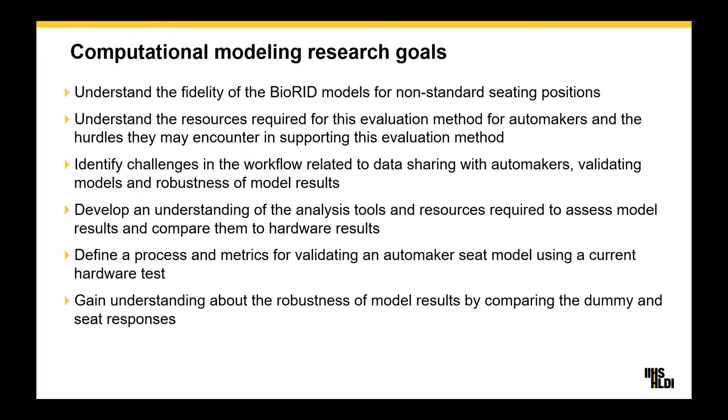We want to define a process and metrics for validating an automaker seat model using a current hardware test. And finally, we want to gain an understanding about the robustness of model results by comparing the dummy and seat responses.

So in order to achieve all of these goals, we hope to collaborate with automakers and modeling experts. We are very new to this field, and we are looking for help from you in understanding what's going to be required to move forward. We've outlined this plan, but we also understand that it's a process and that it may change as we move through the steps. So if you're interested in collaborating or sharing your expertise in this area, please reach out and let us know.

So in summary, our whiplash research goals for 2021 are: first, assess alternate crash severities for correlation with insurance injury claim rate data. And then identify realistic out-of-position scenarios.

Verify that the BioRID physical dummy and computational model can represent an out-of-position scenario. Develop a method for assessing the fidelity of automaker seat models. And assess whether FE simulation can provide accurate and meaningful representation of the physical dummy and seat response for the out-of-position load case.

And that's everything. Thank you for your attention, and I look forward to your questions.

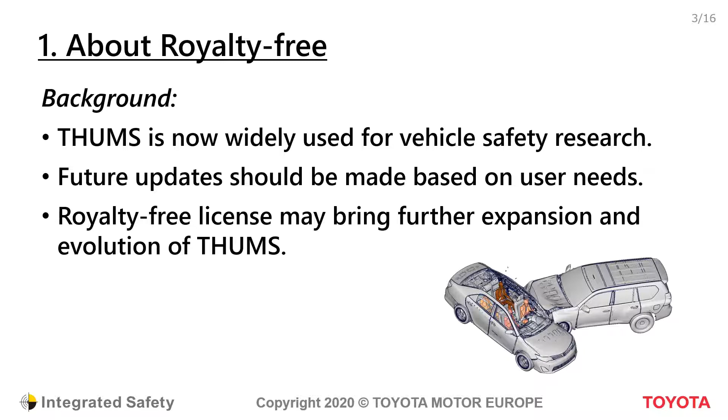So first, the pure facts: what models will be available from January. Basically, it is all 4 commercial models that currently exist. That means version 4, occupant and pedestrian, each for the 50th percentile male, the 5th percentile female, the adult 95th percentile, and the 3-year, 6-year, and 10-year-old child models, as well as the version 5 occupant models and version 6 occupant models - 50th male, 5th female, and 95th male.

So what else will we have? We will also provide other variations which are currently not available. For example, there's the AF50, which has been used already for research projects, but also obese occupant models. They are not included in the free model list because they would be provided for research collaborations. So what does that mean? There will also be a validation data set for each model, and other variation models for research collaboration will basically be on demand.

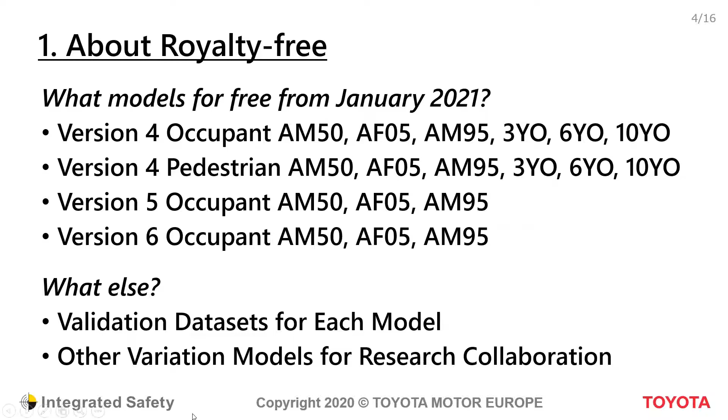So I'm stuck at the moment. Okay, so then what are the terms and conditions that we are currently developing?

They are not 100% finalized, but the essential thing is already decided. That is, for example, the original copyright will permanently belong to Toyota. We will ask users to register, and that is purely for information on who is having that model - enough to show affiliation and name. We also have no problem with THUMS being modified and shared with other registered users, but it has to always be free of charge. In specific situations, we can understand that commercial support between partners and projects is okay, but the model itself must be free.

So what we expect is that Toyota is informed when you're sharing modified THUMS with other users. And also, to finalize, we recommend that at the moment all existing users should switch to the new agreement from next year - already financially, that is an obvious choice.

Now in the next section, about the recommended use for virtual testing, I will show what THUMS has been validated for and against, so it is clear what various test data described in literature related to these models was used.

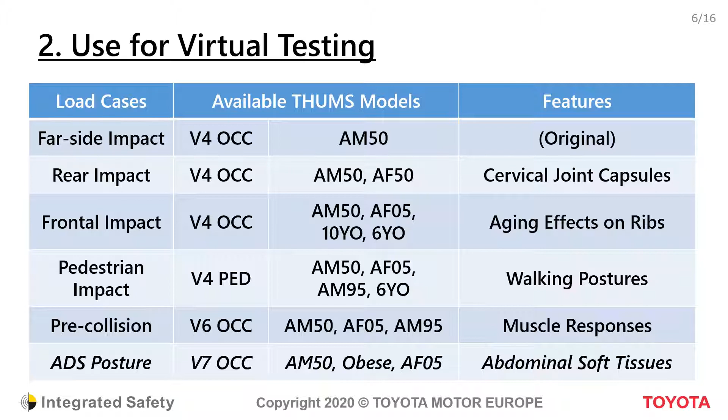One thing that is always included when we provide THUMS is what kind of evaluation has been done. THUMS is available for various load cases.

First, let me go into far side impact. It has been validated to both near side and far side impact tests, and we think you can predict head excursion and also the effectiveness of restraint systems in far side. Of course also in near side, but the latest work was related to far side.

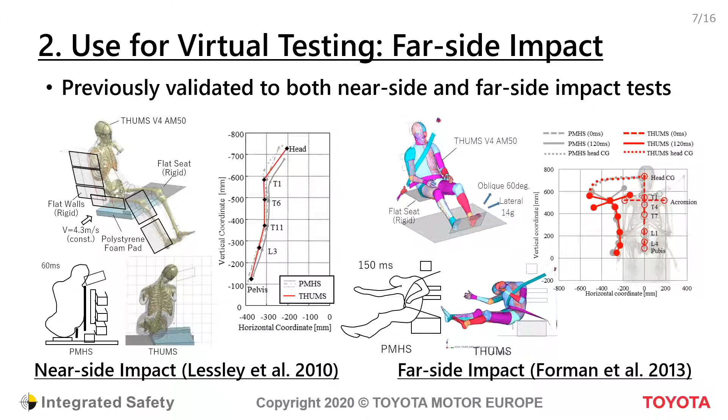Note that there are special THUMS models with detailed cervical joint capsules, so you can calculate, for example, soft tissue strain as well as spine kinematics. For this, the AM50 and the AF50 are available.

For those who are not yet confused, I would like to highlight that it's always mentioned if it is the 5th percentile female or the 50th percentile female. You can refer to the presentation, it will be made available, and probably Astrid will share that via some web service.

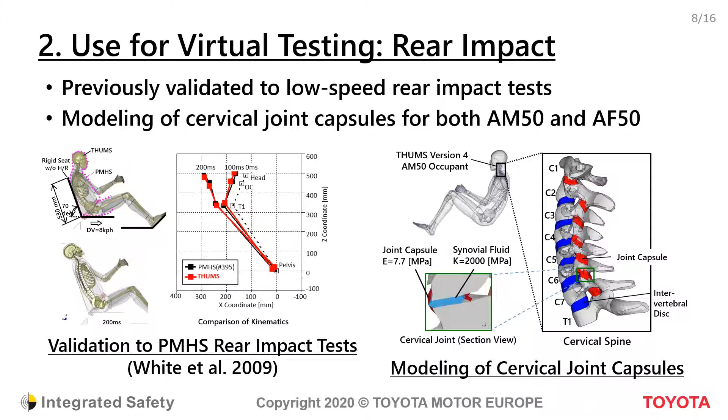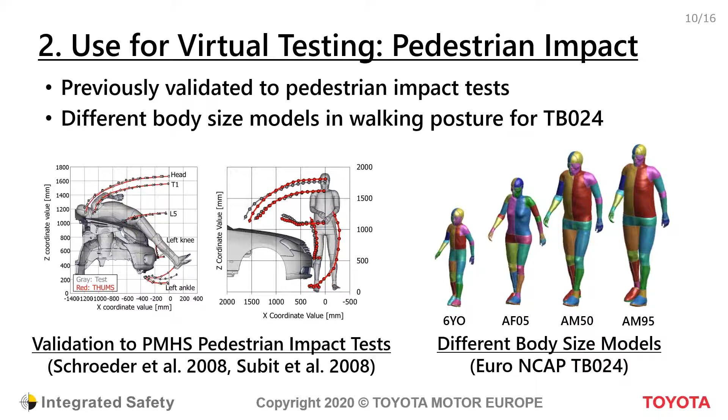Moving to pre-collisions, THUMS was previously already validated to volunteer kinematics in braking tests. The muscle controller enables simulating posture changing prior to collision, and in collision, the simulation can be performed with continuous activation from the pre-collision phase.

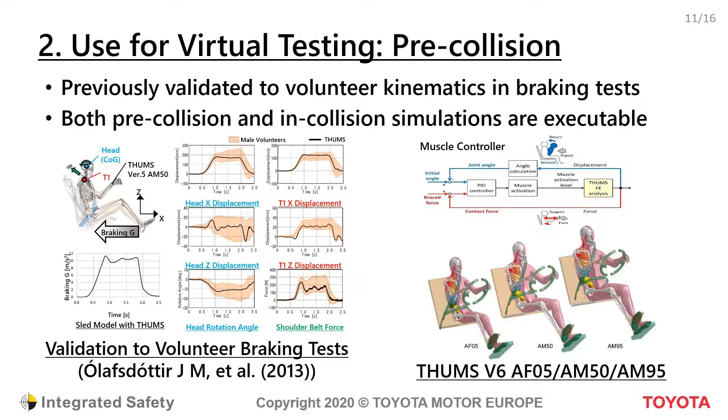Now let's move to the next section, which is future updates. So the current available versions are 4, 5, and 6.

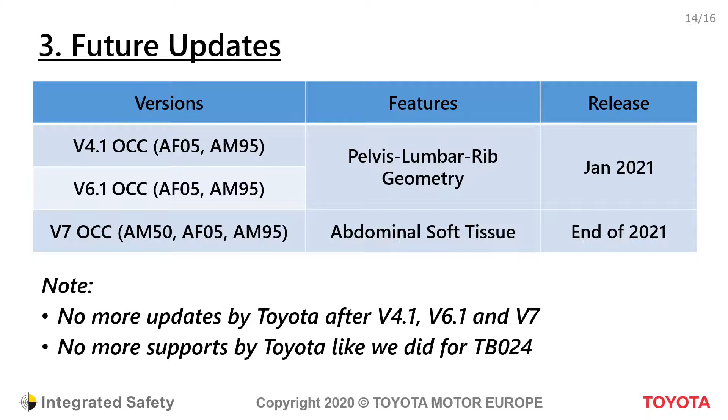Please note that Toyota will not provide updates and support after that. So that means, from Toyota's side, after version 7 is released, we will stop developing THUMS in-house. Instead, we would like to transfer future updates to the THUMS user community.